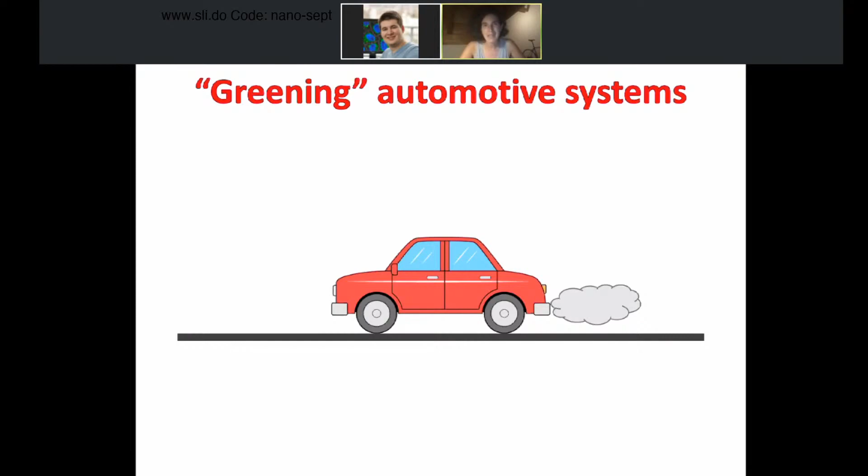So we already heard the talk from Karen, which was really nice, about one way of making automotive systems greener, and that is changing the way we fuel them, in order to make them carbon neutral. And I think that on top of this, we should also give a thought to the ways in which we can get our automotive systems to use less energy, so that we can do more with less fuel.

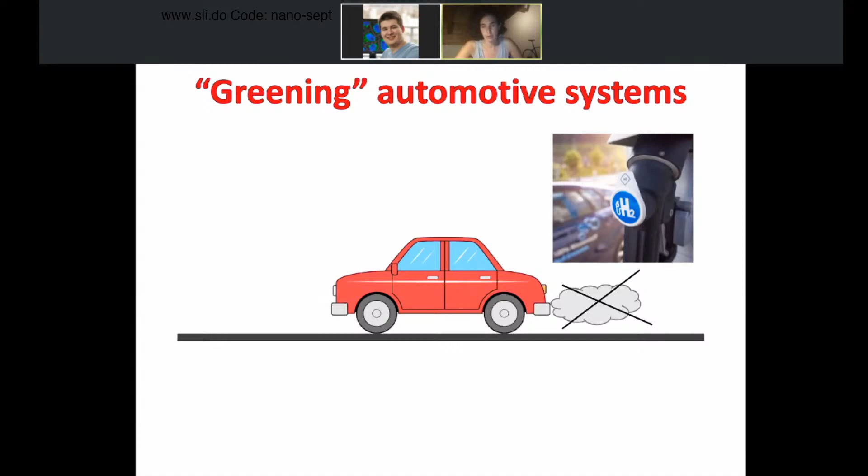And it's actually not only automotive systems, but all sorts of machinery which is powered, like industrial machinery, for example. So there is a really vast range of systems which can really be improved by thinking about how we can reduce the amount of energy they use. And not only the amount of energy, but the amount of material resources.

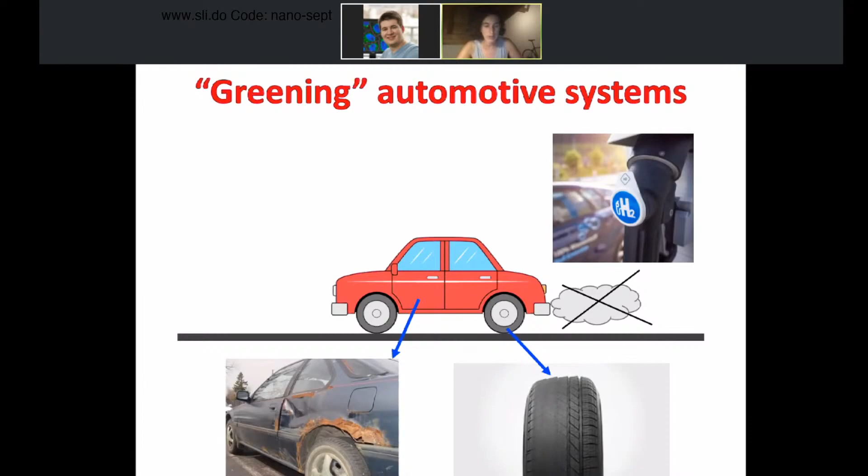So let's take the example of a car, because we are familiar with it. There is, for example, material wear from the friction between the tire and the tarmac, or there is corrosion, which also means that material is consumed and has to be replaced, and that comes at an energy and material cost. And then every single moving part within our car will have some friction to overcome, and overcoming friction costs energy.

So I would like to get you to think during this talk about all these problems as additional things that are really important to think about when we think about making our automotive systems greener. Now, these three problems that I've talked about, which are just an example, all come under the umbrella of tribology. Tribology is the engineering discipline which studies friction and wear, and ways to overcome friction and wear, for example, lubrication.

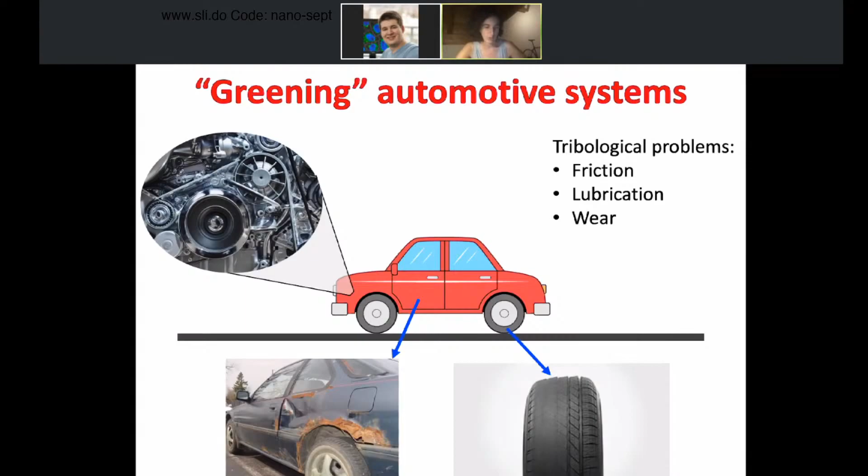And I would like to digress for 1 minute and talk a little bit more about tribology, because it's such an important engineering science, and generally people who are not in engineering have never heard of it. So if at this moment you're eating a snack, the contact between the food and your teeth is a tribological contact, because you're moving your teeth against the food, and there will be friction and wear acting there.

Or, when I move my hand like this, the bone and the socket form a tribological contact, and the synovial fluid lubricating it is the lubricant. So there is a whole area of tribology which deals with the body, including creams and hair products. That's all biotribology. Then tribology can look at a really large scale, like tectonic plates moving against one another. They call it geotribology.

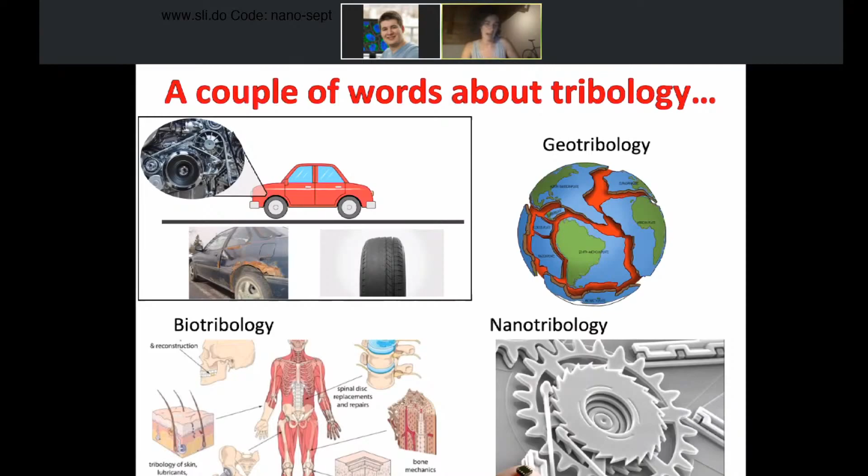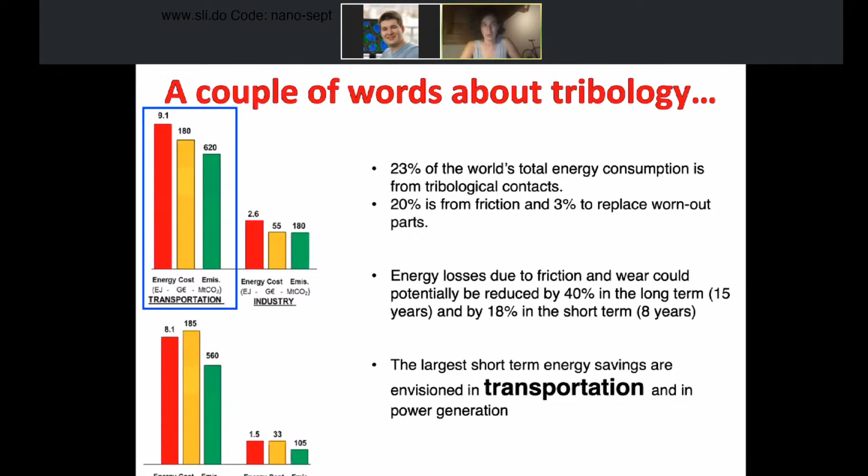And the way we can overcome it is by designing better contacts, better materials, better lubricants, and by looking at what savings can be made with these novel designs. Transportation is actually one of the areas where a lot of energy can be saved by taking action now and implementing novel technologies. So I strongly believe, I feel passionate about the fact, that this is really an important way to tackle going carbon neutral.

So when they're in contact, and you can just try with your hands, you press them, and then you try to slide them. You have to apply quite a lot of force to move them. So this is having high friction. And now, if we take them and just rub an oil or a cream, and you do the same, then the hands would slide much more easily. And so why is it? How does a lubricant work, and what is a lubricant?

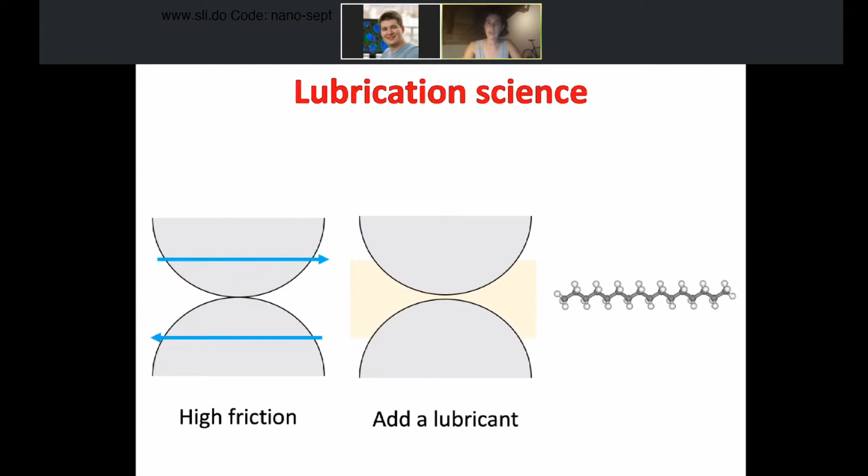So a lubricant is a liquid which has fairly high viscosity. So this is an alkane oil molecule. A way you can have high viscosity in the liquid is having just a really long molecule. And basically what happens is that all these long molecules get tangled together a bit. If you ever try to take spaghetti out of a bowl, that's how it looks. They're just tangled together. And so when you move them by pouring the liquid, for example, they first have to disentangle themselves so that they're able to move. Having something with high viscosity makes quite a good lubricant.

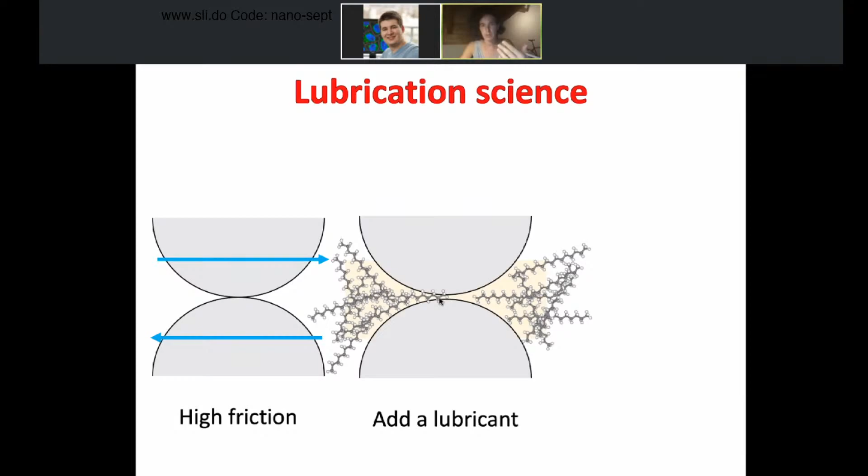Now, when we just add it to our contact, to our two surfaces, a little bit will go in the middle, a lot of it will go outside. So it will provide some separation already of the two surfaces. So we already go from something which is really hard to move to something which is a little bit easier to move. Then when we take our contact with the lubricant and move it, the movement sucks all of the molecules inside the contact. And also with time, it moves them and rotates them so that they're aligned, and you form a nice film which separates the surfaces.

And so the way that reducing friction works is that when you're moving these two components, all you're doing is having these long molecules sliding on top of one another, which is much easier in terms of the energy that you have to provide to the system than having two solid blocks with a lot of asperities trying to slide on top of one another. So this is how a lubricant works.

And okay, from what I say, it might sound that we have it all worked out, right? Like we know how a lubricant works. We know that we need a certain viscosity, but actually there are still a lot of challenges in lubrication science, and I will just talk about one. But I think it should give you an idea of what we need to think about when we are trying to improve a lubricant and make it more efficient, and in that way reduce the friction. So one example that I want to talk about is that of boundary lubrication.

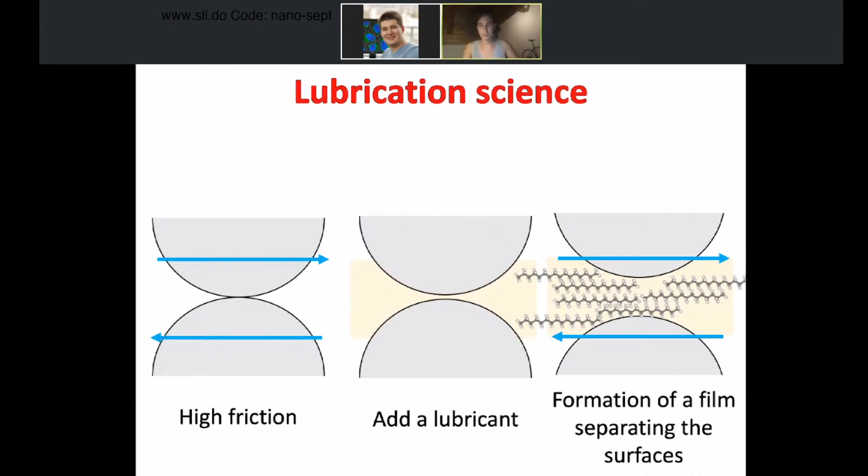And so to go from the static to the moving scenario with a nice thick film, two things happen. First of all, there will be a lot of energy spent to overcome the friction of these asperities moving. And secondly, these asperities will get damaged. So we will also have wear, which will then produce debris. The debris will remain in the system, and overall, it will end up damaging the system.

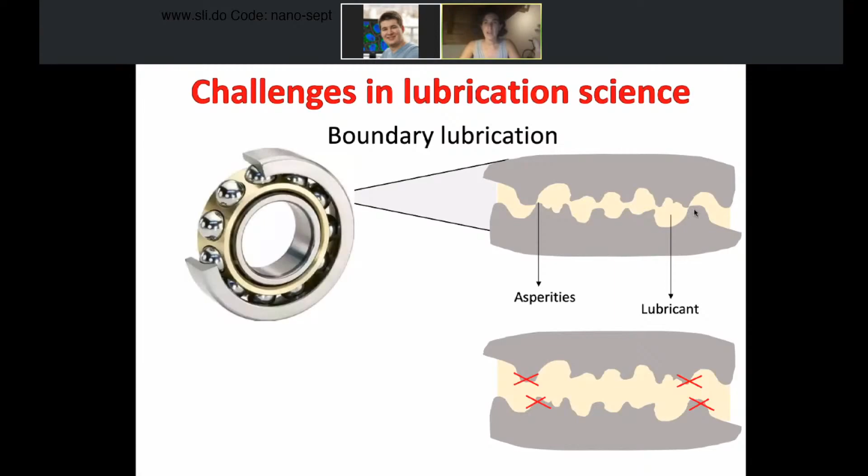So boundary lubrication is really a big problem and is really a big energy expenditure in all machinery with moving parts. It's really the startup when you turn on the engine. So the way to do it is to try and find a way then to never have this scenario, never have the asperities in contact. And so this is something I have worked on.

And so the way to do it is to add additives into the oil. So in this case, there will be friction modifying additives, they're called. So if you remember from a few slides before, the oil looks like this. It's these long carbon molecules with hydrogens. And the additive looks very, very similar, except it has a little different head, which is polar. So the polar head is here.

So what I have here is a description of a contact. So on the top and the bottom are the surfaces of steel. And then here in white and red are the polar heads, which are attached to this steel surface. And these little vertical spaghetti here are the non-polar tails. So what happens is that basically this molecule will really compactly get stuck onto the surface and form two little bristles, which make sure that the surfaces are always separate.

And as you see, the tails are the same as the base oil. So there is no problem really with the interaction between the tail and the base oil, because they're basically the same thing. And then when this thing starts to slide, the film will build up eventually. But even at the very beginning of sliding, this oil will not have to kind of compete with the asperities. The tails will just do the job basically of the oil in keeping the asperities separate.

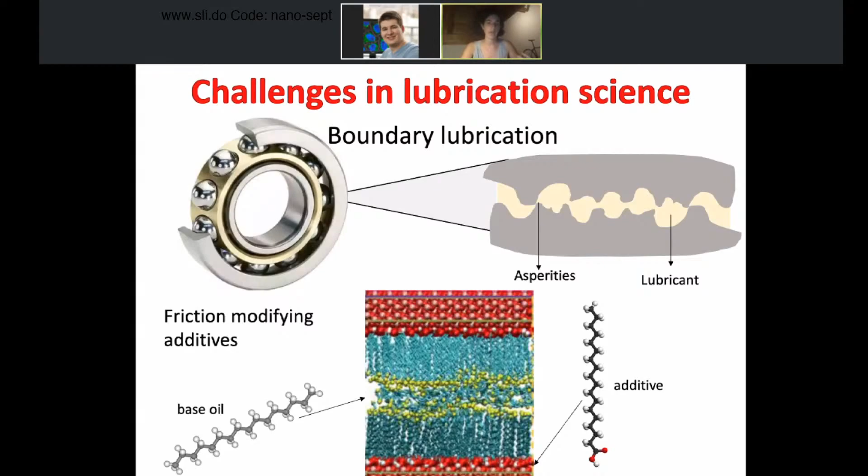Or there are certain materials which will wear very easily, and so there will have to be anti-wear agents. So in the end, what one ends up with is a really complex and customizable multi-component system, where we have some components that will attach to the surface, either to protect the surface, for example, the corrosion inhibitors, or the anti-wear agents, or these friction modifiers. They're not to protect the surface, but to keep the surfaces separate. Or there will be viscosity modifiers, which might kick in at a certain temperature when the viscosity of the base oil becomes too little.

Or there will be more technical components, I suppose, like anti-foam agents, for example. And the whole idea of lubrication science is to tune this zoo of additives in a way that improves the performance. And this comes with its own challenges. So, for example, the friction modifier that I showed you just now, with the polar head and the long tail, is actually an acid which will eventually corrode the surface. So although it really helps at startup, it has other effects down the line. So a lot of the research we are doing is: can we find something that works as well as a friction modifier without, in five years' time, completely destroying the engine or wherever it is put?

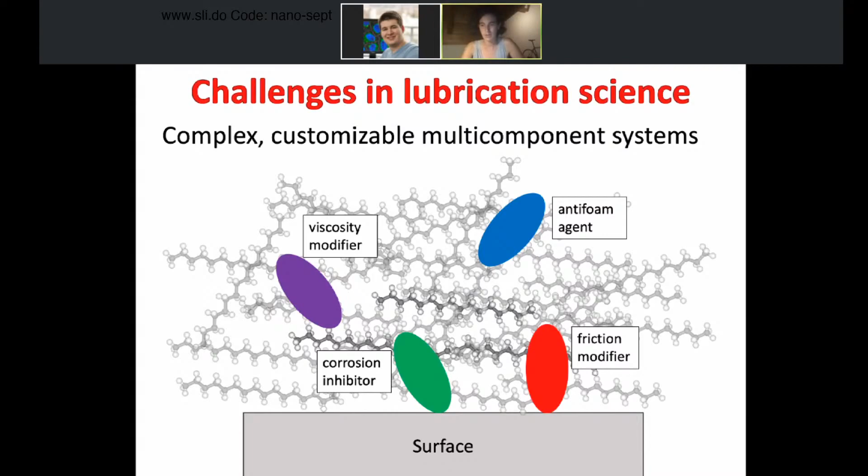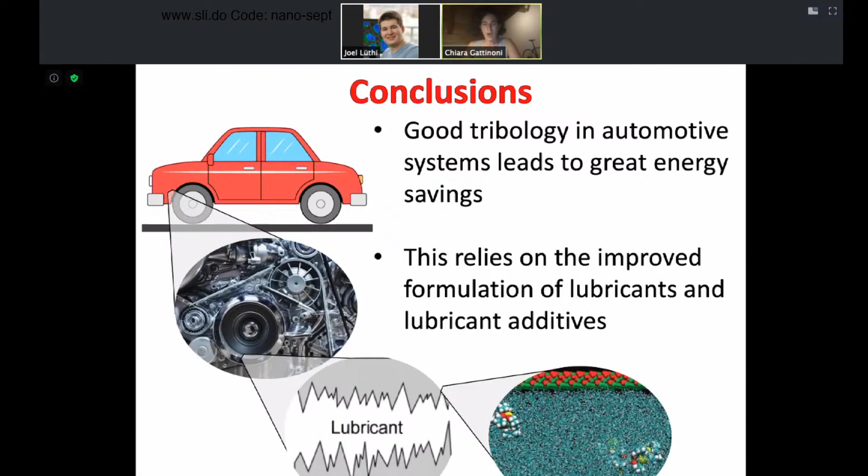Okay, so with this, I would like to conclude. So I showed you one example of how we try to build better lubricants to produce better tribology for automotive systems, to eventually lead us to energy savings and a carbon neutral world. What I showed you is improved formulation of lubricants and lubricant additives. But as I said, this is just one aspect of tribology, and there are a lot more, like greases or different surface coatings that are also becoming more and more relevant. So I hope that you found this interesting and you will look with renewed interest at your car lubricant.